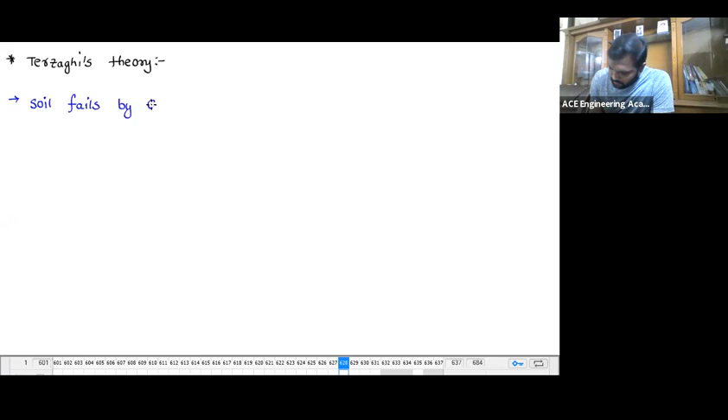Okay, so first thing first, he has some assumptions. What Terzaghi says is soil fails by general shear failure.

And second point is, whatever the base of footing, Rankine assumed the base of footing is going to be smooth. But Terzaghi says that actually this theory is nothing but modified Prandtl's theory. After Rankine, there is a person known as Prandtl, and that modified Prandtl theory is nothing but Terzaghi's theory. So Terzaghi said that the base of footing is not going to be smooth, it is rough.

Let me take a foundation. As I am discussing point number one, the general shear failure, yesterday we discussed that general shear failure and local shear failure can be seen in shallow foundations, which means Terzaghi's theory is applicable for shallow foundation or deep foundation or both? It is applicable only for shallow foundation.

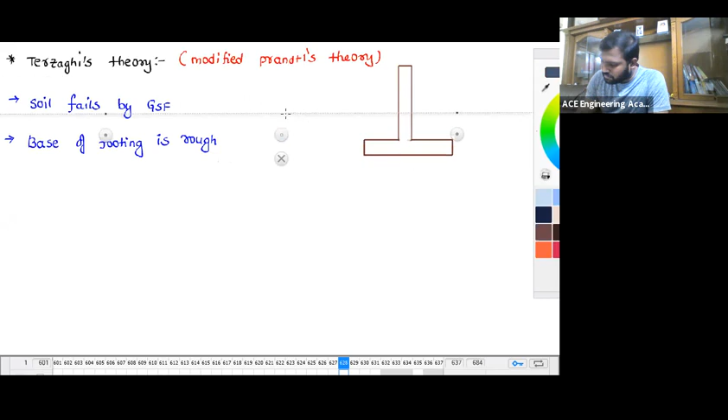So if we take a foundation, let's say this is a foundation, this is the ground level, and whatever the base of footing, this is the base of footing. So now what this says is, whatever load you apply, that load is assumed to transfer at the base of the footing only. Yes or no?

And you see here, this is nothing but the backfill. And let's say the depth of the foundation as D. So this is nothing but the depth of the foundation.

So now if you observe here, whatever load you apply, in the case of shallow foundations, we assume the load is taken by the soil. We assume the load is transferred to the base, which means whatever soil beneath the footing is able to resist the load. And whatever soil above the footing is just considered as surcharge.

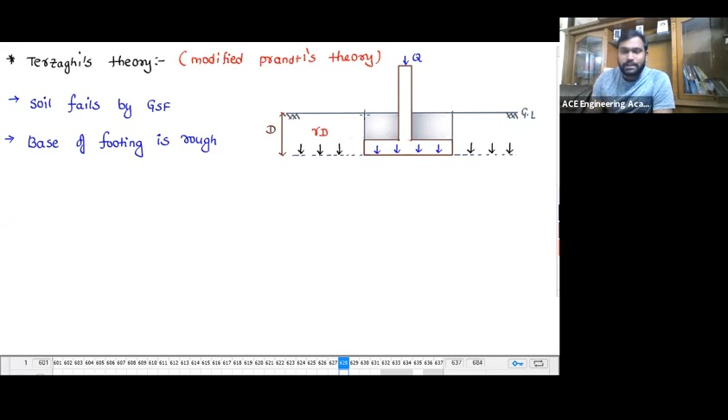So the soil above the base of footing is considered as a surcharge, gamma D, and whatever resistance of the soil mass above is neglected. Instead, what Terzaghi says is that the self weight of the soil mass acts as surcharge at the base of the foundation.

Self weight of soil above the base of footing is considered as surcharge at footing level. Which means the side resistance has been neglected - whatever resistance of the soil mass on the side has been neglected.

And the next one here is, you know that soil fails by general shear failure, base of footing is rough, and obviously when the footing settles down, you know that's a passive state. Passive equilibrium condition exists. So these are all the assumptions made by Terzaghi.

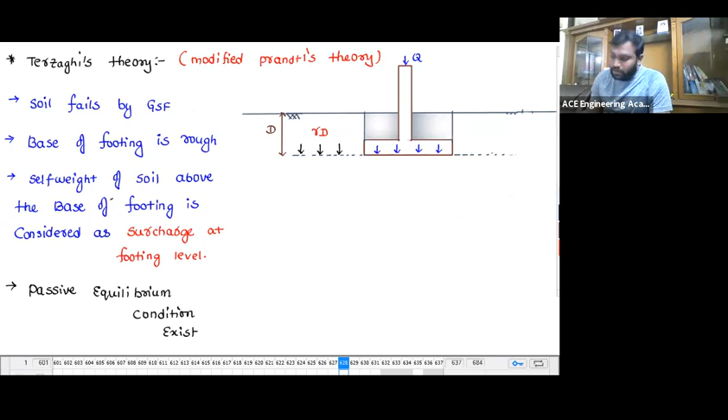Now you can ask me, sir, up to what depth does the shearing take place? The shearing takes place up to a depth exactly equivalent to the width of the footing.

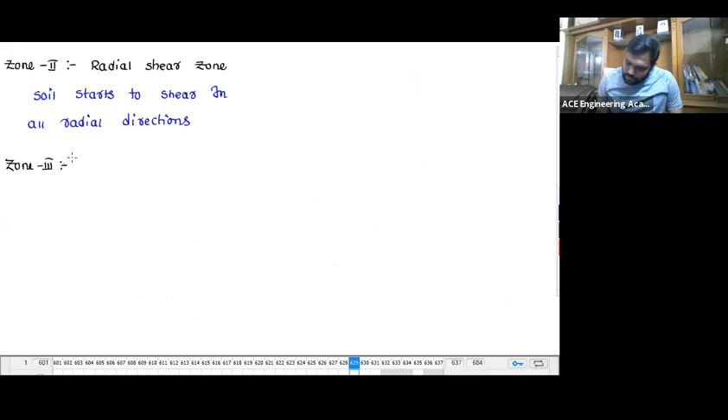In radial directions. Now the third zone, zone 3, is the passive zone. So what is this passive zone, sir? In this case, while shearing, it makes an angle of 45 minus phi by 2, if it is a passive state - go back to the earth pressure theories I told you.

So while shearing, at one point, the soil reaches plastic equilibrium and fails by making an angle of 45 minus phi by 2 with respect to horizontal.

So in the first zone, there is no shearing - it is the elastic zone. Then the radial shearing starts, and finally it reaches plastic equilibrium, going from elastic to plastic. So these are the 3 zones explained by Terzaghi.

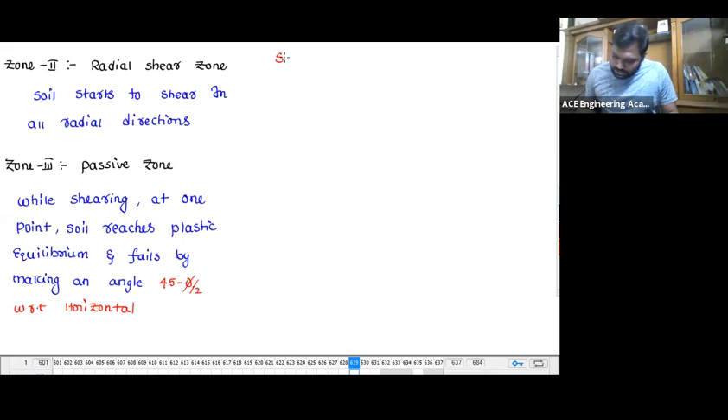After the entire discussion, he has given an equation for the strip footing. So what is the equation he has given for strip footing? Whatever equation I am going to give you is for the strip footing only, because almost all the model analysis was done on the strip footing.

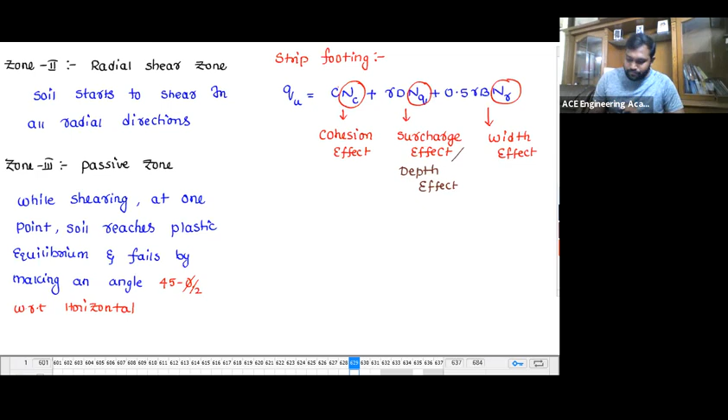Okay sir, you said C is cohesion, gamma D is surcharge, gamma B is width effect. But what about this NC, NQ, N gamma, sir? The NC, NQ, N gamma are nothing but bearing capacity factors, which depend on the angle of internal friction.

So overall, do you need to remember this as a whole formula? No, you don't need to. I can remember it as three parts: cohesion effect, surcharge effect, width effect - cohesion C, surcharge gamma D, width gamma B. So cohesion bearing capacity NC, surcharge bearing capacity NQ, and width N gamma. And if it is a strip footing, the factor is 0.5. So Terzaghi has done his analysis on strip footing only.

Sir, why do you show dotted lines above the base of footing? Because whatever resistance you would expect - the side resistance - is neglected. You know that when shearing happens like this, there must be some resistance. And you see, on top, the resistance we neglected - side resistance has been neglected. That's why.

Okay. If you want, I can show you that too. The resistance - whatever, this is nothing but resistance.

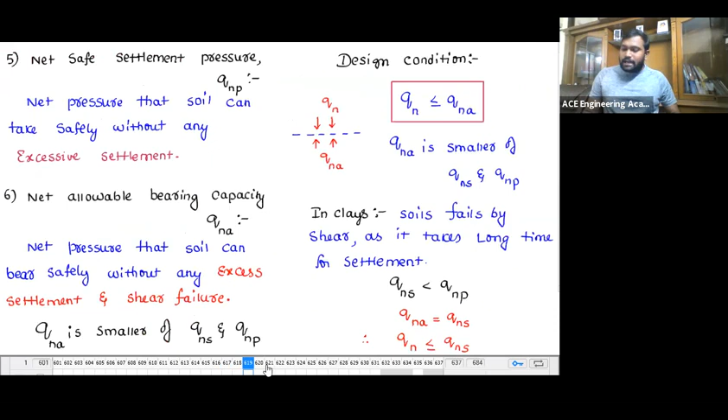So now, once I know the ultimate bearing capacity, what is the design condition I discussed with you yesterday? I hope you people have gone through the notes. I explained that the gross pressure from the structure should be less than or equal to safe bearing capacity, or net pressure from the structure is less than or equal to net safe bearing capacity.

So if you know the ultimate bearing capacity, then you can find out net ultimate as ultimate minus gamma d. And you can find out the net safe as net ultimate by factor of safety. And if you find that, you can find out the safe as net safe plus self weight. Fine, so this is the equation.

Now let's see the modification. Sir, you are saying NC, NQ, and N gamma are bearing capacity factors that depend upon phi. Sir, in examination, will they give NC, NQ, and N gamma? Yes, they will definitely provide you NC, NQ, and N gamma, except for clay soils. Why? Because in the case of clay, phi equals 0, right? For clay, the values are fixed.

Let's see that. NC is a function of phi. NQ is a function of phi. N gamma is also a function of phi. Phi means angle of internal friction. So all these NC, NQ, N gamma are functions of angle of internal friction. Okay, so now if you observe...

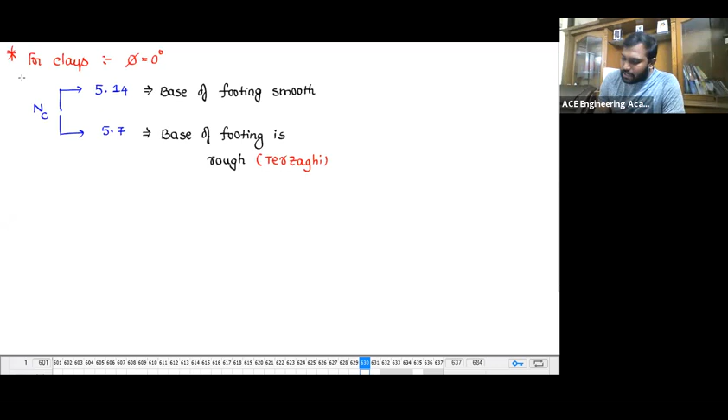Base of footing smooth. And if the base of footing is rough, then we call it NC 5.7. So what Terzaghi mentioned is the base of footing is rough. See, you have to remember this one clearly, because in examinations they sometimes say assume the base of footing is smooth, or assume the base of footing is rough, or else, as per Terzaghi, base of footing is rough.

And what about the smooth case, sir? This was given by Prandtl, my dear, not Rankine. I told you Terzaghi's is a modified version of Prandtl's. Why? Because Prandtl assumed - Prandtl did the same thing, but Prandtl assumed the base is smooth. But if the base is smooth, it is not a rigid foundation. The base should be rough so that it acts like a rigid foundation.

Surcharge effect is the soil exactly above the footing, or soil above the foundation level - that is the soil above the foundation level, whatever soil is above the foundation level. Okay, so now, NQ equals 1, N gamma equals 0. You have to remember this.

NC value is 5.14 when base of footing is smooth, and 5.7 when base of footing is rough. So NQ equals 1 and N gamma equals 0. NQ equals 1 and N gamma equals 0. So now let's recall our equation - whatever equation we have.

Everywhere I use this as a parent equation, that's it, and I'll do modifications. Simply have a look, remember N gamma is 0, NQ is 1.

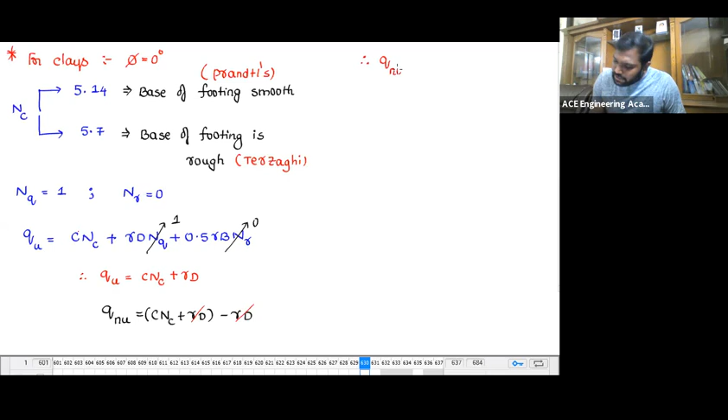So CNC plus gamma D minus gamma D, both are going to get cancelled. So eventually, in the case of clays, what is the net ultimate bearing capacity? CNC. So QU... right, so the net ultimate bearing capacity is nothing but CNC.

If you observe in the case of clays, from now onwards, if I want to design, design condition: Q less than or equals to QS. What is QS? QNS plus gamma D. What is QNU? QNU by factor of safety plus gamma D. And what is QNU? CNC.

So eventually, in the case of clayey soils, if I want to find out the net ultimate bearing capacity, I am removing the width effect, I am removing the surcharge effect. Can I give you one point after all this discussion? If you see the ultimate bearing capacity, can you see any width effect?

Ms. Ikra asks, why can't we take QS equals QU by factor of safety? In the ultimate bearing capacity, there is a self weight. Are you going to apply the factor of safety for the self weight? I told this point yesterday. Why we are not providing factor of safety for self weight is that self weight is acting for a long period of time, and if there is a failure, the failure is due to external load, not due to the self weight.

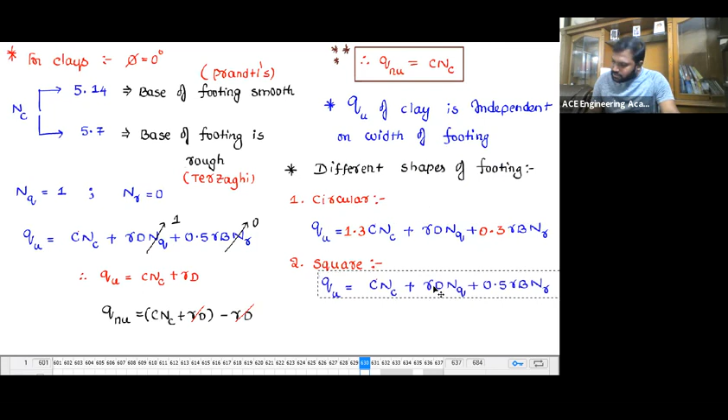Now, second one, square footing. If it is a square footing, again, same - let's take the same equation. You understand? You have to understand. Again, here also, so if I say square footing, then what is the change, sir? Again, in the case of the square footing also, the cohesion increases by 30%.

The shape factor is going to be 0.4. For circle, 0.3. For circle, 0.3. For square, 0.4. For strip, 0.5. Understood?

Now let's see the rectangle. In the case of the rectangle, how does it look like? Now, if the shape is going to be rectangle, for rectangle, how does the QU look like?

So in this case, QU is 1 plus 0.3 B by L, same CNC. 1 plus 0.3 B by L CNC plus gamma D NQ plus - or let me write this separately because

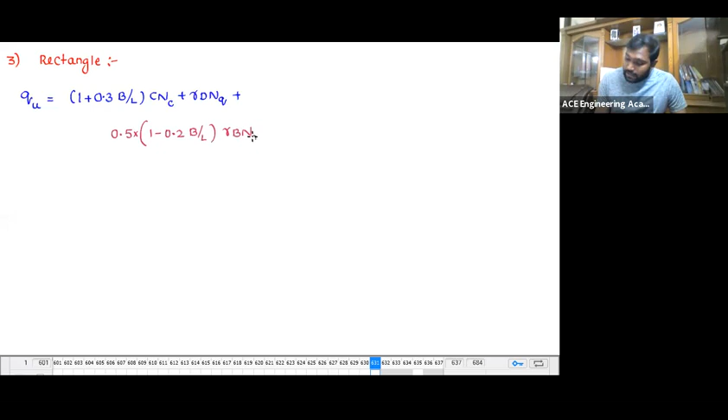Now plus gamma D NQ plus 0.5 into 1 minus 0.2 B by L, gamma B N gamma. Gamma B N gamma.

Okay, so now if you observe here, if you keep B by L as 1, then 1 plus 0.3 becomes 1.3. If I keep B by L as 1, 1 minus 0.2 is 0.8, into 0.5. 0.8 into 0.5 means half of 0.8, which is 0.4. So in the case of the rectangle, QU equals 1 plus 0.3 B by L CNC plus gamma D NQ plus 0.5 into 1 minus 0.2 B by L gamma B N gamma. So circular, square, and rectangle - these are small modifications.

The main equation is whom? The main equation is Terzaghi for strip. If I say square, cohesion increases by 1.3 and shape factor 0.4. For circle, 0.3 shape factor, cohesion increases by 30%.

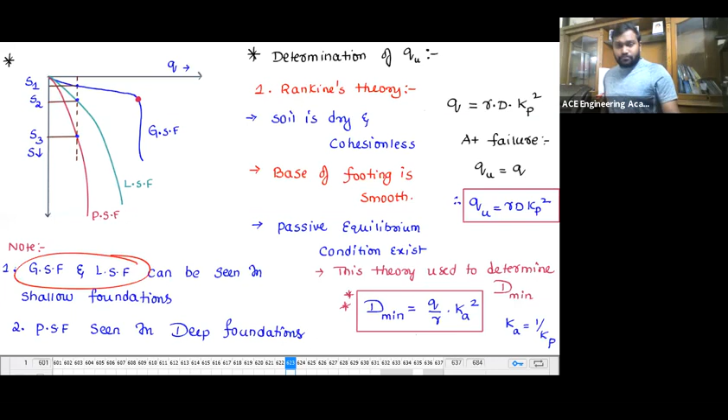Now, one more thing. Terzaghi said this theory for whom? General shear failure. But you know that general shear failure and local shear failure can both be seen in shallow foundations. But what is the biggest difference between general shear failure and local shear failure? This is a full shearing, but this is a partial shearing. The meaning of full shearing is that full cohesion and full friction are going to be mobilized. The meaning of partial is that the developed cohesion and friction are not the actual values.

So now if you observe, for local shear failure, which means LSF, when phi value is less than 28 degrees. So whenever in the given question they sometimes mention local shear failure, else if you see the phi value less than 28 degrees, you have to take it as LSF.

So now in this case, what to do? Same equation, I'm not going to change the equation. You see how many times I'm using the same equation. But sir, then what is the difference? The simple difference is going to be here: the C is no more C, the C becomes CM, and phi is also going to change, right?

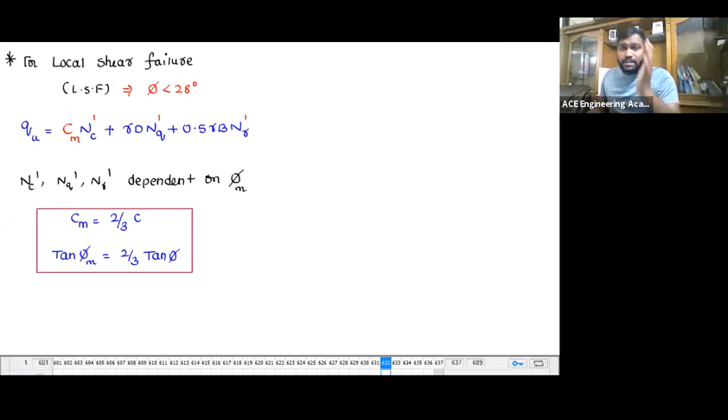Here it's all about understanding the modification. So if it is a local shear failure, the shearing happens locally or partially, so the strength is not mobilized fully. Cohesion will not mobilize fully. How much will it mobilize? Only 2/3 of the actual value.

So that's about local shear failure. Sir, we consider different types of shapes? Yes, we consider different shapes. Yes, we consider different soils. Yes, we consider different failures.

Now one thing is left over, which is nothing but Terzaghi's main concept. Terzaghi's principle is based on effective stress. And the effective stress comes into existence when there is a water table. Now let's see the effect of water table. What is the effect of water table?

By using the Taylor's chart, we don't find mobilized cohesion, sir. How come you find out? You don't do that, that is for the stability of slopes. This is for the stability of foundations. Okay, so effect of water table - now let's take a footing.

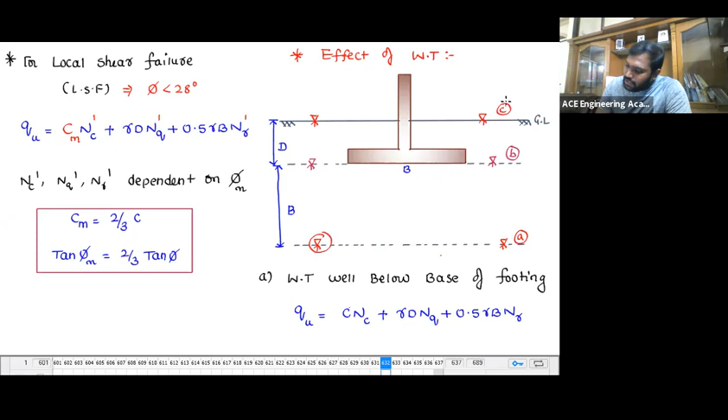Now, in the case of cohesionless soil, if water table rises from A to C, can I take gamma common? Yes. And after the water table rises over here, can I take gamma dash common? Yes. Which means, in the case of cohesionless soil, when the water table rises from well below the base of footing to the ground level, gamma is changing to gamma dash.

When gamma is changing to gamma dash, is it reducing or increasing? Obviously, gamma dash is very, very less. Gamma is changing to gamma dash, which is almost half, not exactly half, but almost half. So when the water table rises from well below the base of footing to the ground level, in cohesionless soil, the ultimate bearing capacity reduces by almost 50%.

In cohesionless soils, when water table rises from well below the base of footing to ground level, the ultimate bearing capacity reduces by almost 50%. Why, sir? Because gamma is changing to gamma dash, gamma is reducing to gamma dash, and the gamma dash is almost 50% of the gamma.

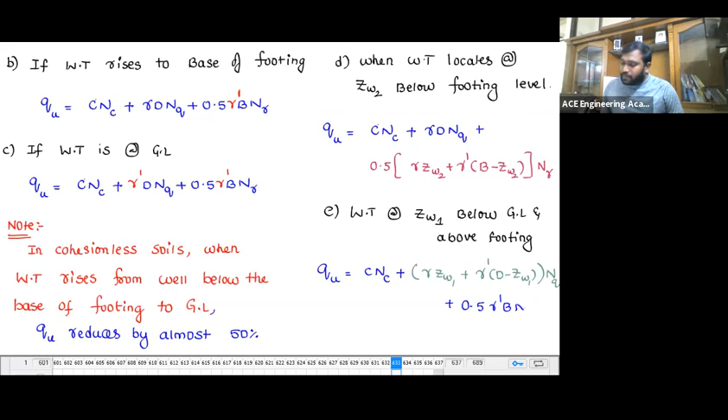You tell me, do you really need to remember all these formulas, whatever is written, whatever discussion I've done? No, if you have understood, then you don't need to. What you need to understand is: below water table, only submergence; above water table, gamma. That's it.

And for this explanation, there is one more method known as the approximate method, based upon some factors — ultimate bearing capacity based upon water table reduction factors. See, this is exact analysis, whatever discussion I have given, A, B, C, D, E. Now there is one more methodology known as the approximate method, based on water table reduction factors.

Again, same equation, but what changes here is we will include a factor, the water table correction factor, RW1 or RW2. So what is this RW1 and RW2? That's the reason I represent between ground level to base of footing as ZW1, and below base of footing as ZW2.

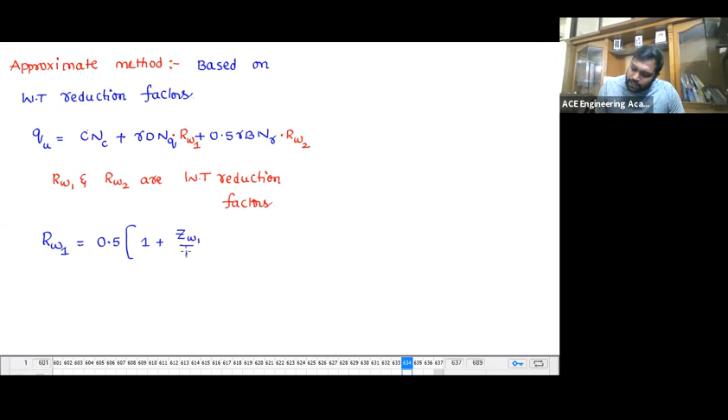So what is meant by ZW1? First, what is RW1? RW1 is nothing but 0.5 into 1 plus ZW1 by D. What is the range of ZW1? ZW1 is below the ground level — meaning if the water table is at ground level, ZW1 is 0.

Give me a minute, please.

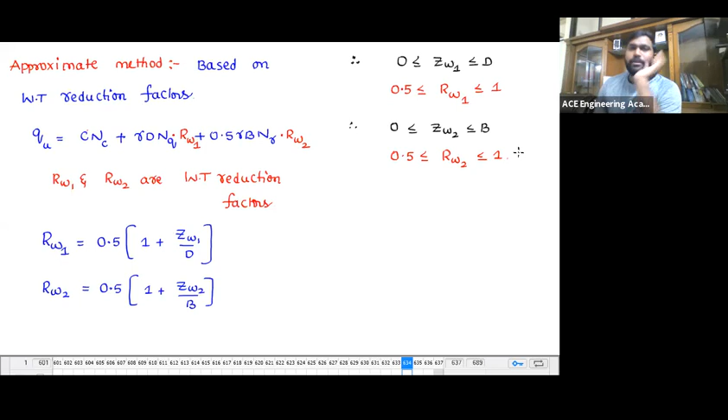Case A: when water table is well below the base of footing, when water table is well below the base of footing, when water table is well below the base of footing, then you please tell me what is ZW1?

When the water table is well below the base of footing, then what is ZW1? Come on, tell me, what is the ZW1? Papa, water table is very well below the base of footing. Here, what is ZW1? Do you think ZW1 is D plus B? No. What is the maximum depth of ZW1? The maximum depth of ZW1 is D only. Yes, so what is ZW1? It is going to be D.

Okay, and what is ZW2? What is ZW2? The ZW2 is also going to be B. So when the water table is here, the maximum value of ZW1 is D only, and the maximum value of ZW2 is B.

So now you tell me here, when ZW1 is equals to D, what is RW1? RW1 is equals to 1. RW2 is equals to 1. Yes or no? Now if you substitute in the equation, what should be the value? This is how the ultimate bearing capacity looks like. Yes or no? So CNC plus gamma D NQ plus 0.5 gamma B and gamma. I hope you understood.

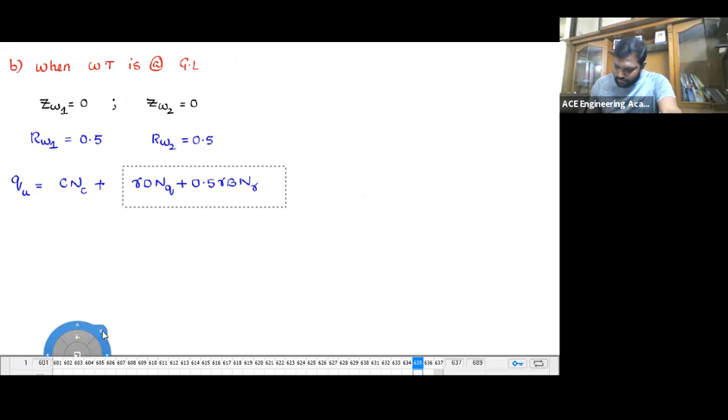So now RW1 and RW2 are going to be 0.5. Now if I write the ultimate bearing capacity, in this ultimate bearing capacity, I have two factors, right? So RW1 and RW2. So this is going to be 0.5 into this value, and this is going to be 0.5.

Yes or no? Now, can you please tell me, from this itself, you can say if it is a cohesionless soil, if cohesionless soil, if C is equals to 0, then what is QU?

Gamma D into NQ plus 0.5 gamma B into N gamma. I'll show you the conclusion I've made, and represent it here too. So if C is equal to 0, what is the ultimate bearing capacity here? I can take out the 0.5 common, yes or no? Gamma D into NQ plus 0.5 gamma B into N gamma. Hope you got this. This is 0.5 into gamma D into NQ plus 0.5 gamma B into N gamma. Understood or not? This is the water table correction factor.

All this analysis I have given for the sake of better understanding only. You don't require too much detail. If I asked you, at a particular depth, find the water table correction factor, can't you find it out? One value, RW1 and ZW1, should be used below ground level, above footing. And RW2, ZW2 should be used below footing, and above, well below the base of footing. Hope you understood.

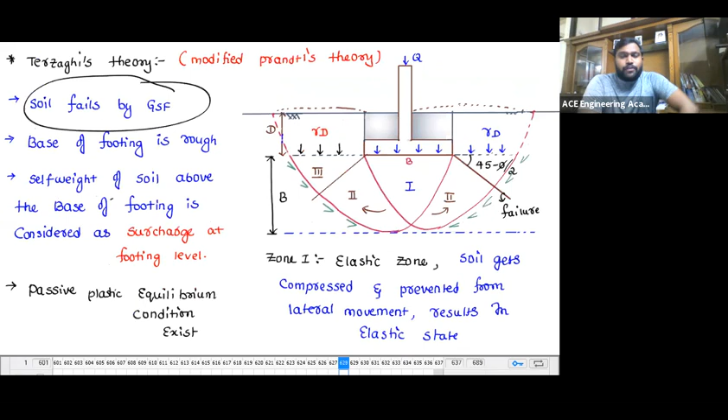Number two: Terzaghi's theory is only for general shear failure, which means it is only for shallow foundations - he did not account for depth. This theory is not suitable for pile foundations or deep foundations, so I cannot use it there.

So one thing for sure, listen carefully: Terzaghi did not account for different shapes. He took only strip footing - his entire analysis is for strip footing only. But we managed it somehow and wrote these equations ourselves. So shape has not been considered, shape has not been considered, okay. Number two.

It is suitable only for shallow foundations, so he did not consider the full depth. Whatever the depth, whether shallow or deep, he did not consider it - he considered only shallow foundations. Depth factor also not considered. Number three.

Do you think the load is always going to be concentric? Don't you think footings can be eccentric too? Yes, it can be eccentric too. Do you think loading or footing is always going to be concentric? Concentric means center, so sometimes the load can be eccentric too. So he did not take care of eccentricity - he didn't even bother about it.

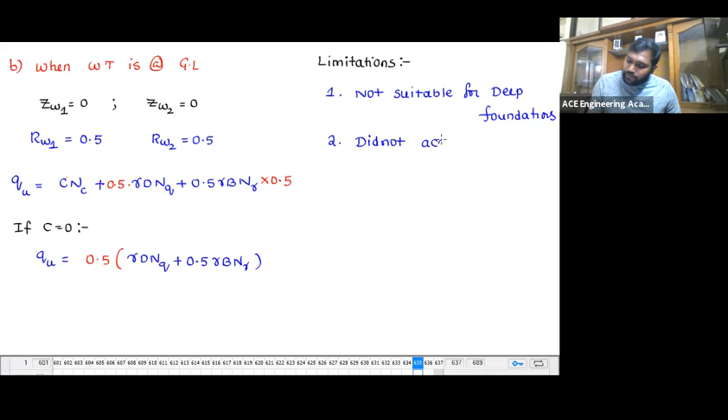The limitations for various theories. Number one, it is not suitable for deep foundations. Did not account for footings other than strip footing.

Okay. Inclination of load and depth factor is not considered. So these are all the various limitations of Terzaghi's theory. He provided for water table, but the biggest limitation is it is suitable only for shallow foundations.

And there comes the next theory, which is Skempton's theory. Sir, can we use this theory for stratified soil? Yes, you can use it. There is no problem with stratified soil.

So now the second theory is Skempton's theory. What is this Skempton's theory, sir? Skempton's theory says that this theory is suitable for undrained cohesion only.

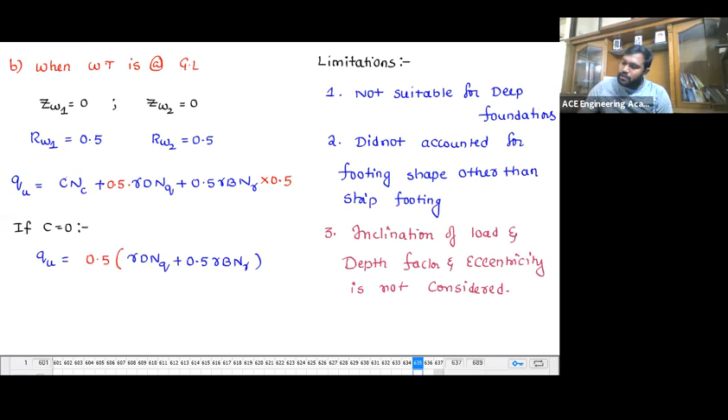Inclination of load, depth factor, and eccentricity are not considered. Okay, so according to Skempton, what he said is, for clay, what is the net ultimate bearing capacity? The net ultimate bearing capacity is C times Nc. Skempton also used the same thing. The net ultimate bearing capacity is C Nc only, he didn't take care of anything else.

Now, what is the difference? Nc is 5.14 according to Prandtl. Nc is 5.7 according to Terzaghi. And now, in the case of Skempton, Nc is not going to be constant. There comes the difference because it should be applicable for both shallow and deep, right? So Nc equals 5 into 1 plus 0.2 D by B, because for shallow or deep, it has a different width, different depth. So for different depth and width, the D by B value changes, and Nc value changes. This is for strip footing.

So strip footing, this is for strip footing. And what about other footings? Nc equals 5 into 1 plus 0.2 D by B into 1 plus 0.2 B by L. Yeah, if you ask me to remember this, yes, you have to.

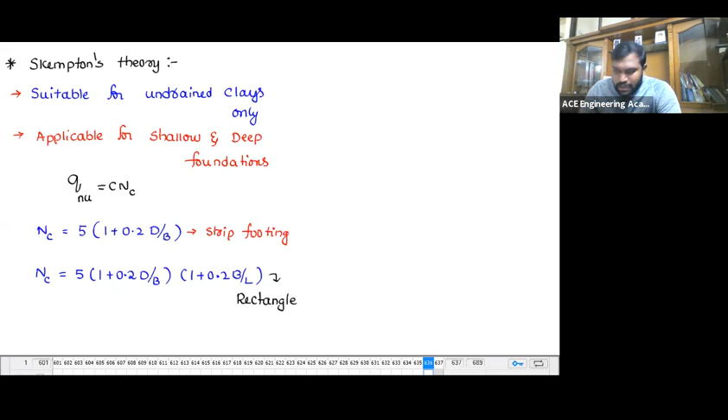Arey baba, you asked me a good question. One of our students is asking, sir, what if there is a surcharge? Sir, already whatever soil is above the footing is also surcharge. For example, if you have to apply 50 of surcharge, then it is going to be gamma D plus 50. That's going to be the surcharge. So whatever soil or load is above the footing, you have to take it as surcharge.

So for a rectangle, now if it is a square, what is going to happen? If it is a square, then B by L equals 1, so it's 1 plus 0.2, which is 1.2. 1.2 into 5 is 6. So then it's 6 into 1 plus 0.2 D by B. So this B by L is taking a shape into account.

Shape account. For strip footing, I don't need to worry about shape because L is greater than B. But for rectangle, the shape is different. For square, the shape is different, dimensions are different. So the shape factor was accounted for, and depth also accounted for. So you have taken care of depth and shape. But still, this lacks inclination, and it still lacks eccentricity. Okay, so this is for square footing.

You see, I am not taking too many formulas. I am taking only one formula, a very cute, sweet formula, known as net ultimate bearing capacity, which is CNC. And in that NC, we are changing everything. In the case of Skempton's theory, he took depth and shape into account, but he did not account for inclination. By taking all this into the factors, now there comes one more theory known as Meyerhof's theory.

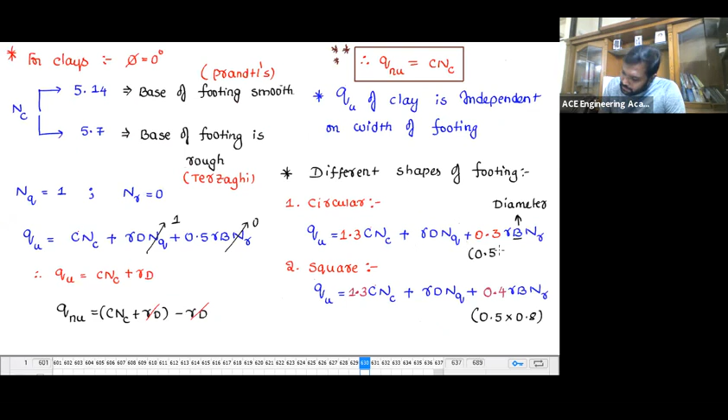Sir, here we are taking into consideration the phi equals 0 point. Very good question again. Now let me go back once again. This is the basic equation I told you. And how I attained these values: 0.4 is nothing but 0.5 into 0.8. The 0.3 is nothing but 0.5 into 0.6.

You observe, the shape factor is 0.6 here, and the shape factor is 0.8 here. So 0.5 into some factor gives 0.3, and 0.5 into some factor gives 0.4. Understood or not? Similarly, you observe here also, 0.5 into this factor is nothing but for the rectangle.

So now, instead of using all these things, I'm giving you finally one value. Okay. So this is about Skempton's theory and Meyerhof's theory.

And still one thing is left over: that is eccentric load. If we complete eccentrically loaded cases, the analytical things will be completed in this chapter. So now let's see what this eccentric load is. So if I were to give an eccentric load, what happens?

So I am dividing every topic as a scheme, and once you understand this, you can digest it easily. Now, so far so good. Whatever discussion we made, whether it is Rankine's, Terzaghi's, Skempton's, or Meyerhof's, everybody took the load as a concentric load. But what if the load is not concentric?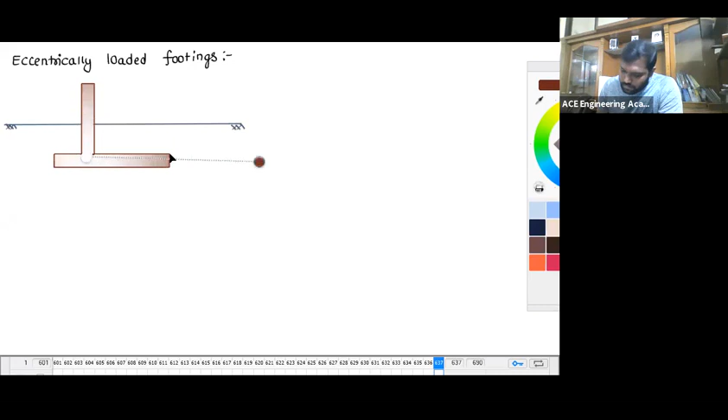Eccentrically loaded footings. So in the case of the eccentrically loaded footing, what if the footing is not concentrated? Let's take a footing. Listen to me. If this is a footing base, and let's say the footing is not at center. I mean the column is not at center. So this is the ground level.

Now in the case of the ground level, if you observe here, whatever load I am applying is Q, and the line of action... whatever the line of action. From the center, let's take this is the center. From the center, in the axis where I am seeing the width axis, let's take whatever this value is, Ex. Whatever the eccentricity, eccentricity means from the center only, right? If this is Ex, then what about this value, my dear?

What about this value? The total width is b by 2, no? This is the center. So from the center, the load is acting at Ex. And what about this value? This is nothing but b by 2 minus Ex. Can I say like that? Yes. Questions are also framed from this only.

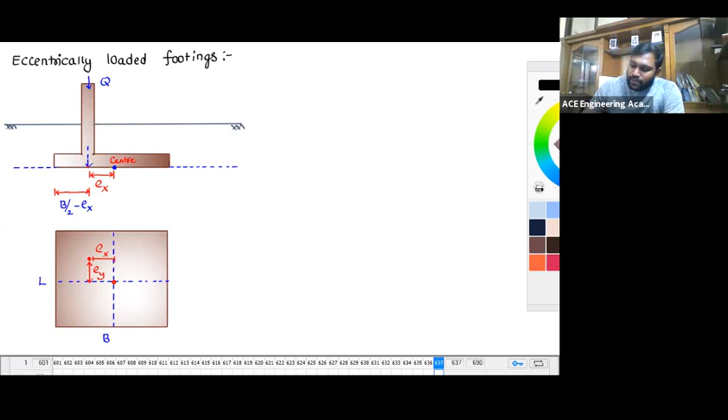Yes or no? Now you tell me, does the load have a one-way eccentricity or two-way eccentricity? From the center line in the X direction, the eccentricity is Ex, and from the center line in the Y direction, it is going to be Ey. So is it one-way or two-way eccentricity? It's a two-way eccentricity. What if I say the point is only here? Is it one-way or two-way eccentricity here? Now this is only one-way, because the point lies on the center line, but has some distance in the x-axis.

So now based upon one-way or two-way, if it is two-way, there are two eccentricities, Ex and Ey. Now please observe, this is two-way eccentricity. Fine. I hope I was able to make you understand what is Ex and Ey. Okay, come on, you know this value. This value is nothing but same b by 2 minus Ex. And you need to know this value also, right? What about this value?

What about this value? This value is nothing but L by 2 minus Ey.

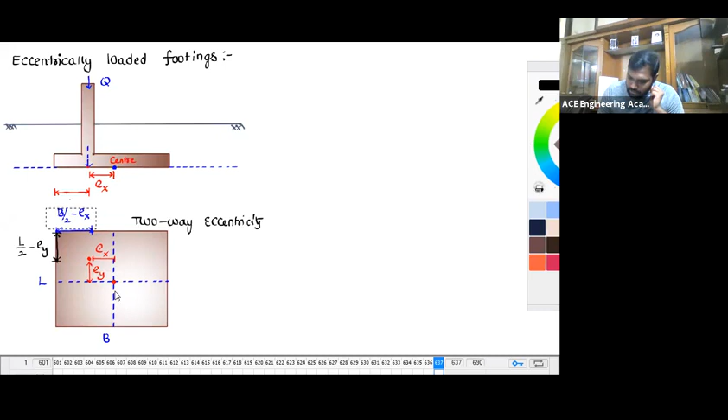Now after all this discussion, whatever theories have been explained, whether it is Rankine's or Terzaghi or Skempton's or Meyerhof, everybody assumed the load is acting at center, a concentrated load.

So I don't have any theory which represents eccentrically loaded footings. So I have two options now. One option is either we create a new theory for eccentric loading, or we use the existing theories. If we want a new theory, we'd have to do research, but you are not doing research, you are going for examination, so don't bother about that.

The second option is much better. What is that second option, sir? Concentrated load. But sir, here it is eccentric, na? Then what can I do? I will convert the eccentric load into an equivalent concentrated load.

So to apply the existing theories in order to find out the ultimate bearing capacity, I am going to convert this eccentrically loaded case into an equivalent concentrated load. Sir, how is that going to be possible, sir?

Simple. What I'll do is, I don't take the total area now. I will just take the area where this load is going to act as the center. Now you see how I'm going to do that.

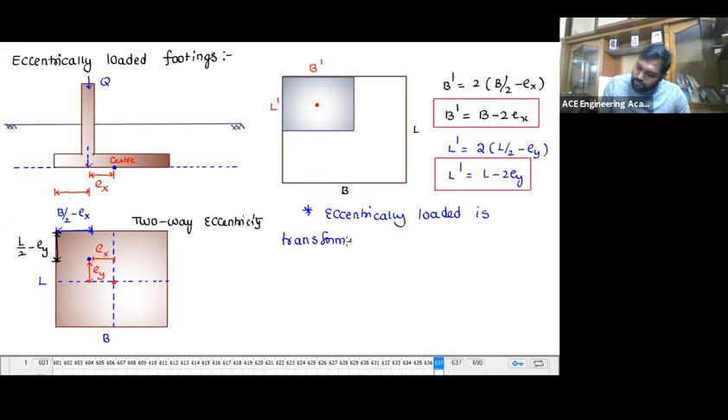Okay, so what we have done is we have reduced the base area to B dash by L dash. The eccentrically loaded footing is converted, or transformed, to an equivalent concentrated load footing by reducing the base from area B by L to B dash by L dash.

And what about the ultimate bearing capacity now? The ultimate bearing capacity is cNc, what we know, I can write that - everything the same equation we take. But what is the change? The change we are going to see here is simply B becomes B dash. The same equation, but with eccentricity, B becomes B dash.

Sir, where do you use L, sir? When you are going to find out the loaded area, na, QU equals load by area - in that area you have to reduce this to B dash by L dash. So hope you understood now.

If it is one-way eccentricity, for example, if the load is acting at one-way eccentricity now, with EX only, for the one-way eccentricity, what would be there? So again, you take this point, now you take the center.

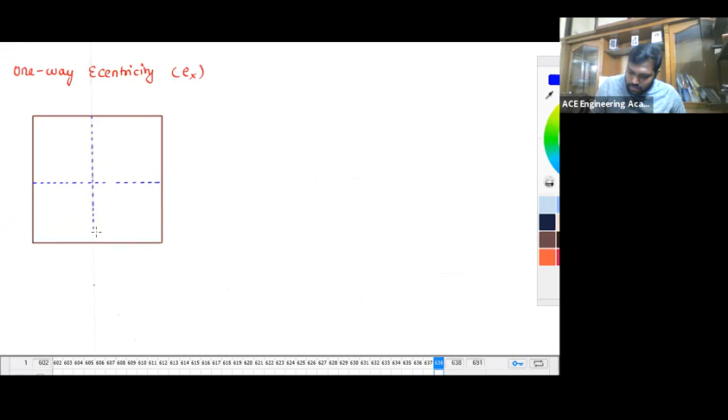So this is a center. Now let's say the load is acting over here with a one-way eccentricity only. With one-way eccentricity only. So now what do we do? Come on, now what do we do?

If it is a one-way eccentricity, I don't need to modify the length direction. No, I don't need to. So what I do is I have to make sure this point is a center. So if I want to make sure this point is a center, now please observe, what I'll do is I'll just mark up the same distance on the other side.

Now this is B dash and this is L dash, which is equal to L only. So now if I make sure this point as a center, B dash is nothing but B minus 2EX. But what about L dash? L dash is simply L only. So based upon the eccentricity, you have to define it.

And once you know that, what is B dash? B minus 2EX. If you ask me what I'll do now, whatever this value, if I want to make this center, the other width also should be the same. I want to make this point the center, so if this value is B by 2 minus EX, the other value is also B by 2 minus EX. The total width is 2 times of B by 2 minus EX. Hope you understood.

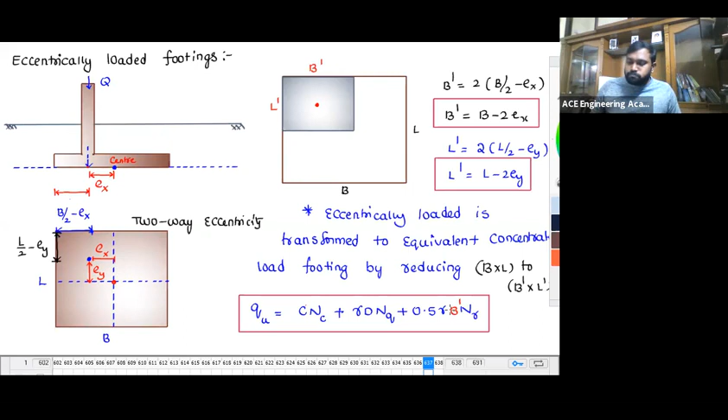So with this, we completed it. Sir, where do we use L? In the area - load is there, right? Whatever the ultimate load, some ultimate load by area would be there. There you are going to find out. Wait for the questions, there I'll explain. Don't worry about that.

So this is the analysis - how to determine the ultimate load carrying capacity, ultimate bearing capacity. Once you know the ultimate bearing capacity, you very well know how to design. So let's have a break now.

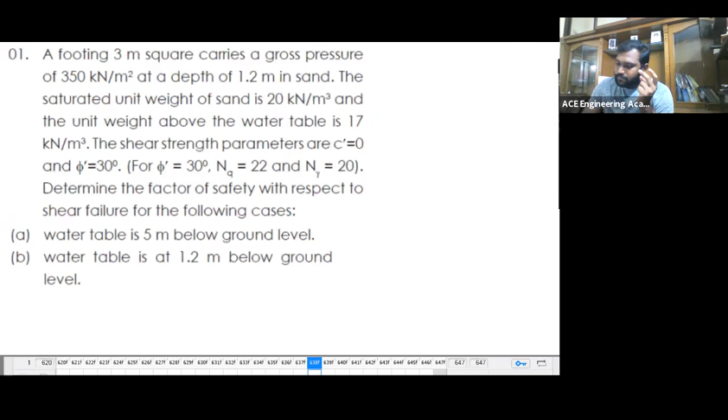Okay, so let's start solving the questions. You see question number one first. I already told you, while solving a question we have to be very careful about what type of footing they are giving, what type of soil they are giving. So we need to be careful about that. You see, in this question it is mentioned a footing 3 meter square, which is nothing but a square footing of 3 meters - square footing 3 by 3 meters.

Carries a gross pressure of 350 kilonewton per meter square. So there is a square footing which carries a gross pressure. What is the meaning of gross pressure?

Vaibhav Vasudhani, is this chapter over? Yes, it is over, you can pack up. Give a minute, please.

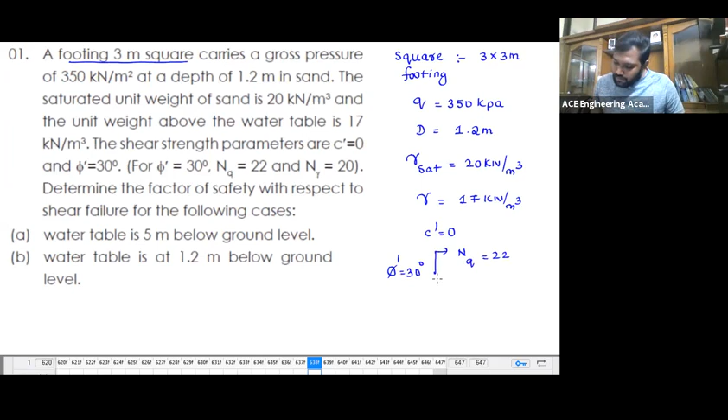So we have mentioned the shear strength parameters, which are C equals 0, and for phi 30 degrees, as I already mentioned, they will give NC, NQ, N gamma. Anyway, when C equals 0, the cohesion effect is gone, so I don't need to worry about the cohesion effect. NQ is 22 - don't ask me why they're not giving NC, sir; even if they do give NC, it's of no use. And N gamma is 20.

So what I am asking you is to determine the factor of safety with respect to shear failure. So what is the factor of safety? This is what we are going to see. First thing first, I told you the design condition, right? I told you the design condition. So what is the meaning of design, sir? What is the meaning of design?

If you want to design the width of the footing, the depth of the footing, or you want to know the safe load acting on the footing, and if you want to know the factor of safety, these are all design conditions. So when designing, you need to know the width of foundation, the depth at which you are going to go for the foundation, the load that the soil can take safely, and with what factor of safety you are going to apply that load. Okay, so this is a design criteria.

First, let's draw the figure.

Shubhaibo, you are being in the class, right? You are being in the class, and you know that the chapter is going on. Then how come you think that the chapter is over?

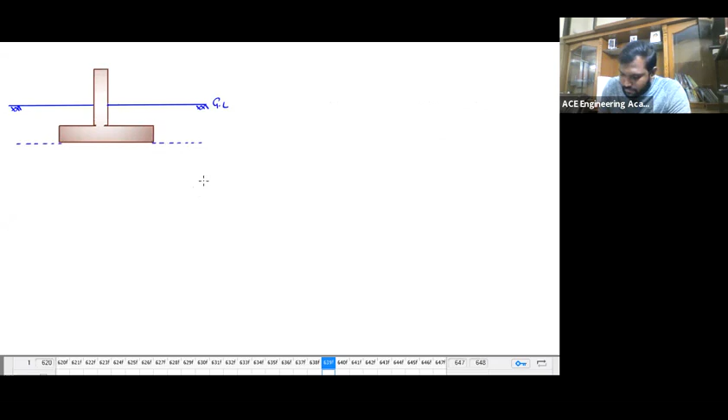So now let's take this as the footing. And you know that this is the ground level. So the footing is located at a depth of 1.2 meters.

The footing is located at a depth of 1.2 meters. And what is the width of the footing we have mentioned? The width of the footing is 3 meters. And whatever analysis we are going to do is up to this depth, which is also going to be 3 meters. So up to that depth we are going to go.

Now let's see how to solve the factor of safety, how you are going to find it out. First case: in case A, water table is 5 meters below the ground level, meaning the total depth itself is 1.2 plus 3. So if water table is 5 meters below ground level, is it well below the base of footing or just below the base of footing? It is well below the base of footing. So this is 5 meters.

Case A: water table at a depth of 5 meters below ground level. So if I say this, is there any change in the ultimate bearing capacity? No change in the ultimate bearing capacity. I want to find out the factor of safety.

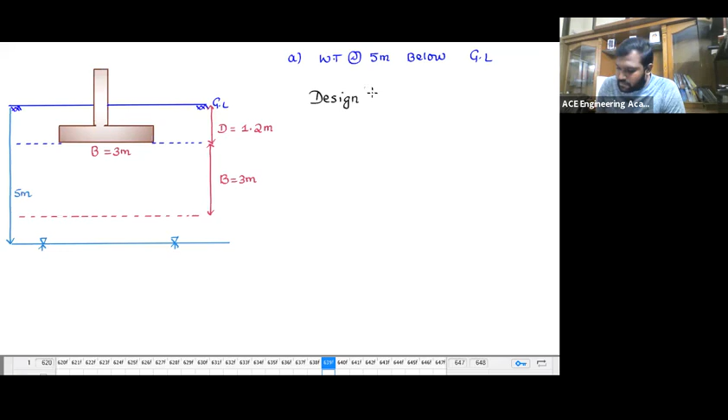Whenever I want to find out either factor of safety, depth, width, or load, you need to go for the design condition. What is the design condition? The design condition is Q less than or equals to QS, and the minimum design condition is Q equals to QS. So the design condition is that whatever gross pressure is acting should be less than or equals to the safe bearing capacity.

And what is safe bearing capacity? Q is equals to QS. Safe bearing capacity is nothing but net safe bearing capacity plus gamma D. And the net safe bearing capacity is nothing but net ultimate by factor of safety plus gamma D. So this is the design condition.

What I want is factor of safety, but for that you need to find out the net ultimate bearing capacity. And what is ultimate bearing capacity? Is it a square footing or strip footing? Square footing. As it is a square footing, it is 1.3 times C N C plus gamma D N Q plus 0.4 gamma B N gamma. So in the case of the water table at 5 meters below, there is no effect of the water table.

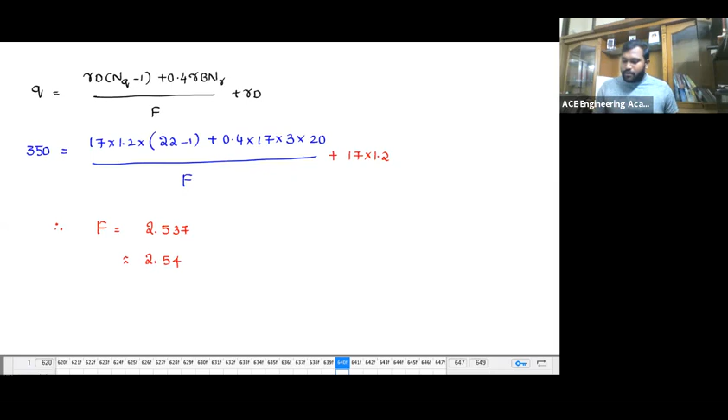Okay, so similarly, what is the difference if the water table is different, tell me. What is the second question? Water table is at 1.2 meters below ground level. If the water table is at 1.2 meters below ground level, this is case A, and this is case B, where water table is at 1.2 meters below ground level.

So now if this is the case, what will change? Tell me where in the entire equation you are going to see the change. Only this gamma becomes gamma dash, that's it, right? For case B, water table is at 1.2 meters below ground level, which means at footing level.

At footing level, so what would be the ultimate bearing capacity? The ultimate bearing capacity is nothing but gamma D into NQ only, plus 0.4 now gamma dash B N gamma. For the first and second question, the only change is this one. Apart from that, is there any other change? Nothing, right?

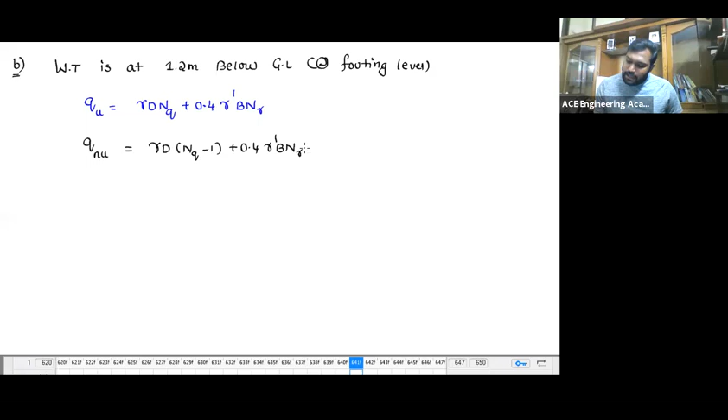So if this is the case, then what is QNU? Gamma D into NQ minus 1, plus 0.4 gamma dash B N gamma. And what is Q? QNU by factor of safety, gamma D NQ minus 1 plus 0.4 gamma dash B N gamma, by factor of safety, plus gamma into D.

So as I am asking you, above the water table this is gamma, below it is going to be gamma sat. I already mentioned gamma sat as 20. Okay, so now hope you understood the steps, yes or no? You have to be habituated with the steps.

This is square, my dear, this is not a strip, it's a square, so it's not 0.5, it's 0.4. So now 350 equals, again, above water table 17 into 1.2 into 22 minus 1, plus below water table 0.4 into gamma dash, gamma sat minus gamma w.

So what is gamma sat? I have given you, gamma sat I mentioned is 20. 20 minus 9.81, into B value, 3, into N gamma 20, divided by factor of safety, plus 17 into 1.2. Find out the factor of safety.

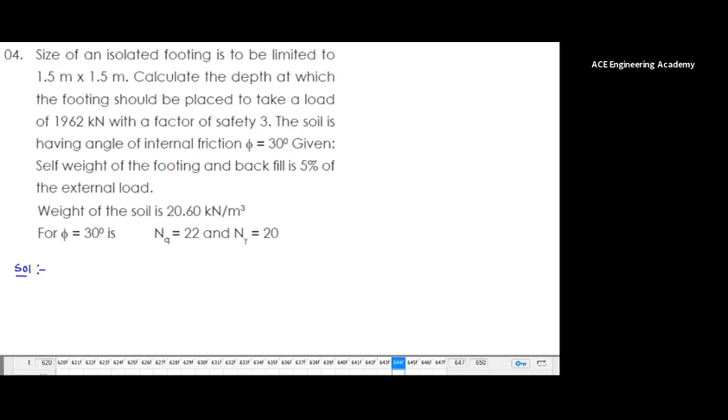So size of an isolated footing is to be limited to 1.5 meter by 1.5 meter. Calculate the depth at which the footing should be placed to take a load of 1962. So I hope you might have understood the question. If you have, now let's see.

So here the size of an isolated footing is to be limited to 1.5 by 1.5, which means it's a square footing, yes or no? So the size is 1.5 meter and this is a square footing. So immediately in your mind, what formula do you have to use?

Okay, calculate the depth at which. So I am asking you the depth at which the footing should be placed to take a load of 1962 kilonewtons with a factor of safety of 3. So I am asking you the factor of safety is going to be 3. Okay, 1962 - that's not the end of the question.

But here, I did not mention anything regarding whether it is gross load or net load. Because when the pressure is coming from the structure, there are two types of pressures - one is gross, another one is net. The soil has an angle of internal friction phi 30 degrees.

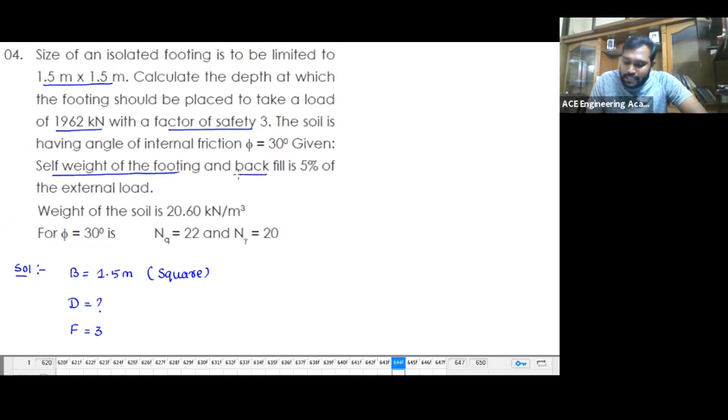Given self weight of the footing and the backfill is 5% of the external load. So whatever the external load is, that's nothing but 1962, right? So the load coming from the structure is 1962. Apart from that, you know that at the base, the total pressure is due to external load plus self weight of the soil. And here they have given self weight of the footing also.

So I can take the net load as 1962 kilonewtons, whereas the gross load is external load plus 5%. So the gross load equals external load plus 5% of the external load. 5% of the external load, which is nothing but 0.2... wait, so now what is the gross load here? The gross load is nothing but 1.05 times 1962.

...60.1 kilonewtons. Okay, so the gross load is going to be 2060.1 kilonewtons. That's the gross load, 1.05 into 1962. Okay, fine.

Now, if you observe, what I am asking you here is the weight of the soil is nothing but the unit weight. I am asking you the depth - that's it. Is it a design condition or not? Yes, it is a design condition.

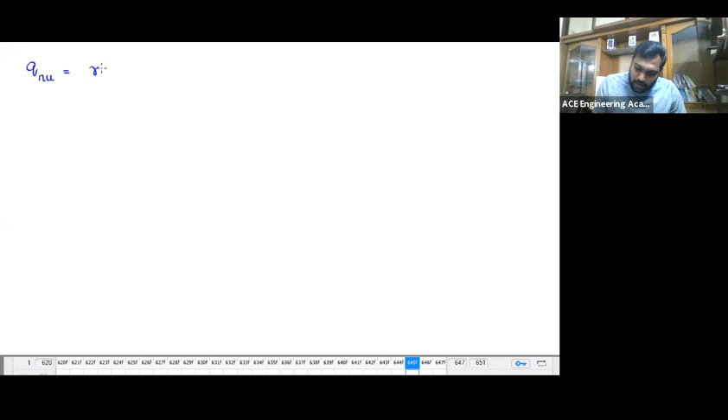So now, if you observe from here, can I write QNU is equals to - should I write everything - gamma D into NQ minus 1 plus 0.4 gamma B N gamma. Why I have written like this is because C is equals to 0. So now Q is nothing but this value - gross load by area equals net ultimate bearing capacity by factor of safety, net safe bearing capacity plus gamma D, gross safe bearing capacity.

So now whatever the gross load I got is 2060.1 by area. By area - what is area? 1.5 by 1.5.

Q is equal to gamma D into NQ. So what I have to write is gamma D into NQ minus 1. What is gamma given? 20.6 into D into NQ, 22 minus 1, plus 0.4 into 20.6 into, what is the B value? 1.5 into N gamma 20. Now, what is the factor of safety I have mentioned? 3, plus gamma 20.6 into D. So please substitute and get to know.

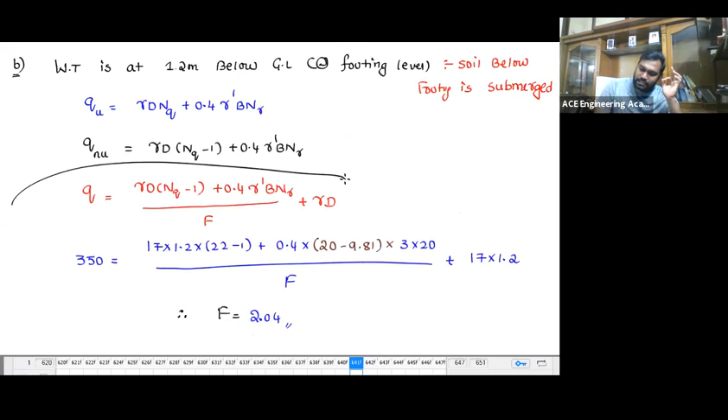I hope you got the difference between the previous question and this question. In the previous question, I gave you the gross pressure directly. Here, I gave you the load, the external load. Then I asked you to calculate the gross load, and then I am allowing you to calculate the gross pressure. So now I hope you understood. Everything at the end, the step is going to be same. This is the same step I used there also.

So please tell me the answer. The answer should be some 6.05. It's 0.23 - why are you getting 0.23 there? 5.06 or something else, tell me the value please. So you take 3 to the other side, whatever this value comes out to be. 0.4 into 20.6 into 1.5 into 20 by 3. 2060.1 divided by 1.5 into 1.5. Nice answer. 833.2. Okay, so this value.

Divided by... so please tell me the D value. What is the D value you got? The D value you got as 5.06. So first we find out the factor of safety, then we find out the depth also. Hope you understood.

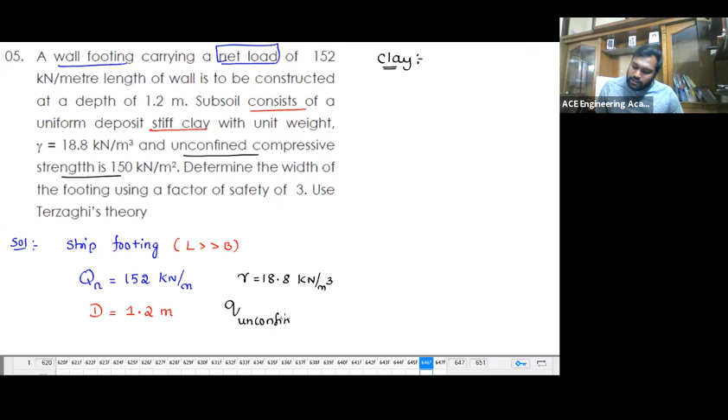I hope if you remember in chapter number 13, shear strength, the unconfined compressive strength is nothing but 2 times the shear strength. Remember this, which is given as 150. So now can you tell me what is CU? 75 kilopascals.

Now you see what I am asking is: determine the width of the footing using a factor of safety of 3, using Terzaghi's theory. Now, whenever you know clay, phi is equal to 0 degrees, and as I mentioned, this is nothing but Terzaghi. For Terzaghi, you know NC is 5.7. Why? Base is rough. NQ is equal to 1. N gamma is equal to 0.

See, I'm going again from basic. If you ask me, the logic is directly I can write net ultimate bearing capacity is CNC. Yes or no? So you know that QU is equal to, it's a strip footing, right? As it is a strip footing, CNC plus gamma DNQ plus 0.5 gamma B N gamma. So now you know that what is happening? N gamma is equal to 0. NQ is equal to 1.

Then QNU is equal to QU minus gamma D. Then what is QNU? CNC. This we know, but what I required is width, right? For factor of safety, load, depth, width, design condition - come on. If you ask me, I would have solved this one with a single step. What is the design condition?

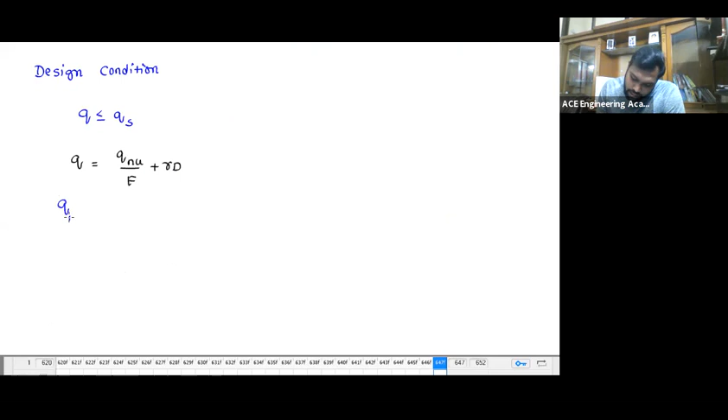But in the given question, do I have net load or gross load? Net load. So can I write the gross pressure as net load plus gamma D? That's QNU by factor of safety plus gamma D. Yes, I can remove the gamma D on both sides, and then write net load by area as net ultimate bearing capacity by factor of safety. As simple as that.

What is the net load given? 152. By what is the area of a strip? B into 1, the area is nothing but B into 1. So B into 1 equals net ultimate bearing capacity by factor of safety. What is net ultimate bearing capacity? C into NC, which is CNC by factor of safety. What is C? 75 into NC 5.7 by what is the factor of safety? 3.

What is the B value? Please tell me. 1.067 meters.

Now, after solving this, do you feel this concept is typical or easy? What I am dealing with is simply one concept, the design condition, and one equation, QU equals CNC plus gamma D plus 0.5 gamma B into N gamma. In that, below the water table it's submerged. If there is a change in shape, factors will change. I hope you understood. Any doubts? Why I took NC as 5.7, as per Terzaghi.

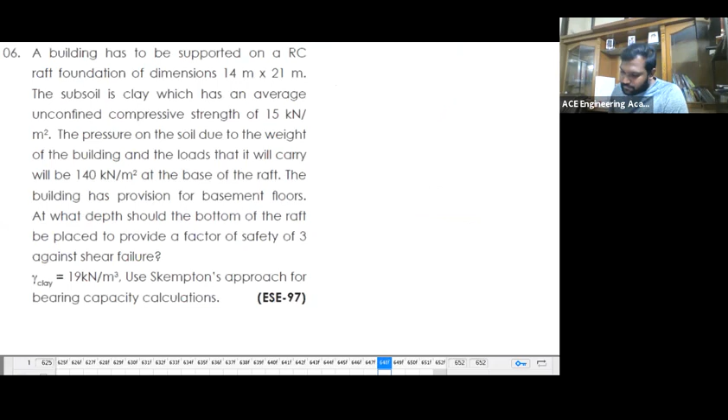Per meter length. Why did I take L is equals to 1? Per meter length, because the load is given as per meter length, right? That's a wall footing, na? You see here, listen to this. This is also one of the beautiful questions. The question is beautiful, if you understand, the answer is very, very simple.

A building has to be supported on an RC raft foundation of dimensions 14 meters by 21 meters. So raft, now you tell me, 14 meters by 21 meters, is it a rectangle or strip? This is a rectangle, okay fine. The subsoil is a clay soil. Very good, so we got to know what type of footing and what type of soil.

Having average unconfined compressive strength, the unconfined compressive strength is nothing but 2 times the undrained shear strength, which is 15 kilonewton per meter square. So what is the CU value? The CU value is 7.5 kilopascals. Okay, now from here, the major thing.

I'm providing a raft foundation, yes. The pressure on the soil due to the weight of the building and the loads that it will carry will be 140 at the base of the raft. And the building has a provision for the basement floor.

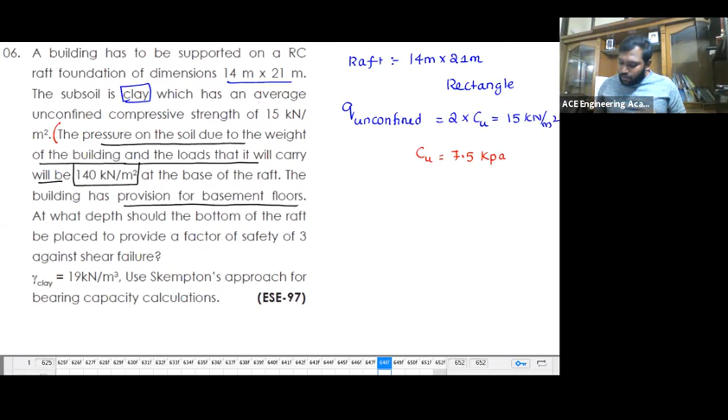Whenever I told you about providing a raft, it means we discussed about compensated raft, right? Let's go back to the compensated raft. Please observe this.

Whenever I provide a raft, see, this is nothing but a raft. But here I am not saying it's compensated. So now can you tell me, the total gross load is nothing but whatever load coming from the structure, that is the gross pressure. Yes or no? Because there is no backfill. When there is no backfill, then what is the Q value? If you have understood this point, then the answer is done.

Hope you got this point, yes or no? So once you got this point, now what I'm asking is, at what depth should the bottom of the raft be placed? I'm asking you, what is the depth? What is the factor of safety I have provided? Factor of safety is 3. Gamma is 19. But this time I am giving you Skempton's approach.

Simply the Skempton's approach is there: depth, width, factor of safety, load, design condition. Now what is the design condition? Q less than or equals to QS. Q is equals to QS. And what is QS? Gross safe bearing capacity, which is net ultimate bearing capacity by factor of safety plus gamma D. And you know that for clay, the net ultimate bearing capacity is CNC. As simple as that, it is CNC by factor of safety plus gamma D. It's all about the NC.

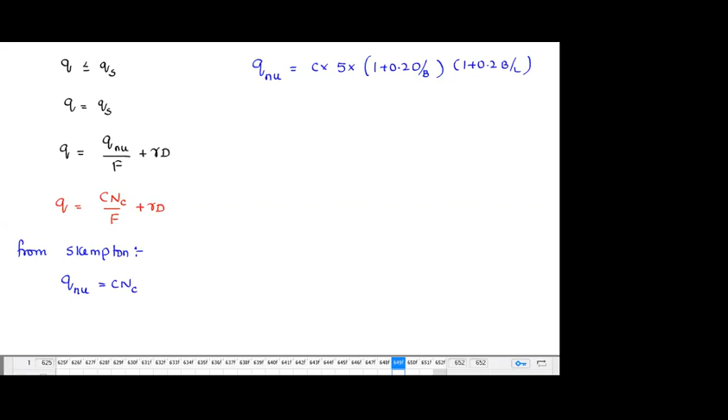So now you see what is the net ultimate bearing capacity here. So what is the C value? The C value is 7.5. Have you understood this logic or not? Here it's all about whatever the given load, is it gross or net? Think. If you get it done, then the answer is done.

Sir, how did you say there is no backfill? That's what, my dear, there is a basement floor. What is the meaning of basement floor? This is the meaning of basement floor. Basement floor is nothing but a cellar. In the cellar, are you going to see any soil mass? No, right? This is nothing but a raft, right? Raft.

So 7.5 into 5 into 1 plus 0.2 into D by, what is B given? 14. Into 1 plus 0.2, 14 by 21. So this 0.2 into 14 by 21, by 21 plus 1 into 7.5 into 5, 42.5 into 1 plus 0.2 by 14, 0.0143 D. So I can write as 42.5 plus 0.607 D. That's it. Now please substitute over here from this equation.

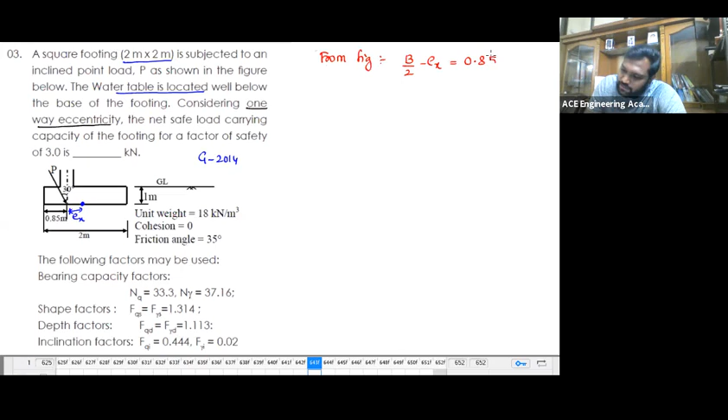Yes, yes, okay. Now, the net safe load carrying capacity of the footing for a factor of safety of 3. I am asking you what is the net load safely that you are going to apply. I'm going to ask you net load.

The net safe load means the net load that you are applying safely. Safely means you are applying factor of safety when condition comes into the condition. So now I am going to find out the net load. What is the factor of safety? The factor of safety is 3. Okay, so I want to find out the net load.

Okay, so forget about the remaining things. First, immediately in my mind: net load, net load, net load. Okay, what is design condition?

What is design condition? I can directly write that: either I can write gross pressure should be less than or equal to safe bearing capacity, or net pressure should be less than or equal to net safe bearing capacity.

Yes or no? What is the net pressure? Net load by area is equals to net ultimate by factor of safety. Oh sorry, no gamma d. Net ultimate by factor of safety, because net safe bearing capacity is nothing but net ultimate by factor of safety.

Everybody understood, right? Up to this point, any doubt? Now let's see.

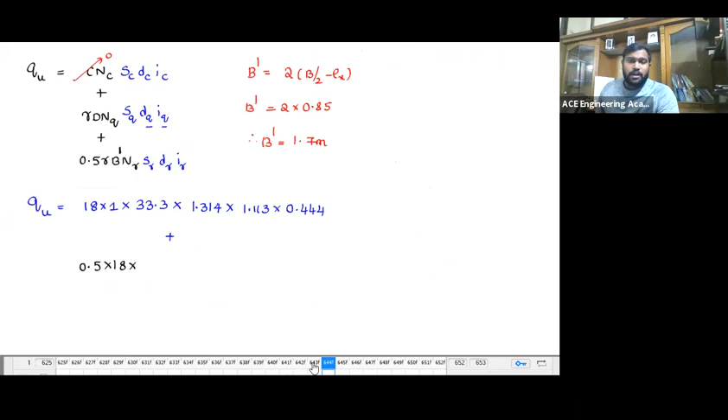Due to the eccentricity, should I have to apply it as B or B dash? B dash. Now what is B dash? B dash is nothing but 2 times of B by 2 minus EX. 2 into 0.85. I can write B dash as 1.7 meters. Yes. Or, B dash is nothing but B minus 2EX, that is, B by 2 minus EX. You can find out EX and you can find out B dash.

So this B by 2 minus EX is nothing but 0.85. From there I can find out B dash directly, as it is one way. Sir, square footing na? Okay my dear, what is Sujana?

I told you when you are providing the shape factor, then why you are going for 0.4? That's what I mentioned, what is meant by that? That is nothing but shape. You don't write that. 0.5 into 18 into 1.7. And what is L dash? One way eccentricity, L dash is nothing but the same because of one way eccentricity.

Okay, so 1.7 into N gamma. Now what is N gamma? 37.16, into S gamma 1.314, D gamma 1.113, into I gamma. What is I gamma? 0.02.

What about the ultimate bearing capacity? 18 into 1 into 33.3 into 1.314 into 1.113 into 0.444, plus 0.5 into 18 into 1.7 into 37.16 into 1.314 into 1.113 into 0.02. So this comes as 405.84 kilopascals, that is QU.

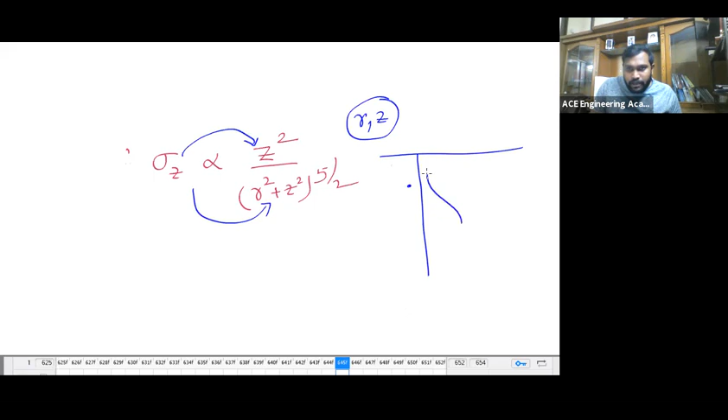But for various values of r comma z, it was observed that if you take any plane, first at lesser depth, the stress is going to increase, reaching maximum. And as the depth value increases, at some point it starts to decrease and decrease, again becomes minimum.

So yes, in this case, there is no peculiar variation. That's the reason why from various values of r comma z, if you substitute r comma z also, we get to know that first it increases, reaching maximum, and then decreases.

And sir, in shear strength chapter, we saw that at some points before the maximum shear stress only soil fails, sir. Yes, it can fail. There is no hard and fast rule like the soil should definitely reach its maximum shear stress. There is some soil, if the soil is weak, if you apply small load, also soil can fail.

Yes. Okay. Thank you. Yes.

Miss Ikra, you can speak out now. Good evening, sir. Sir, I still did not get why are we considering gamma D in raft foundation.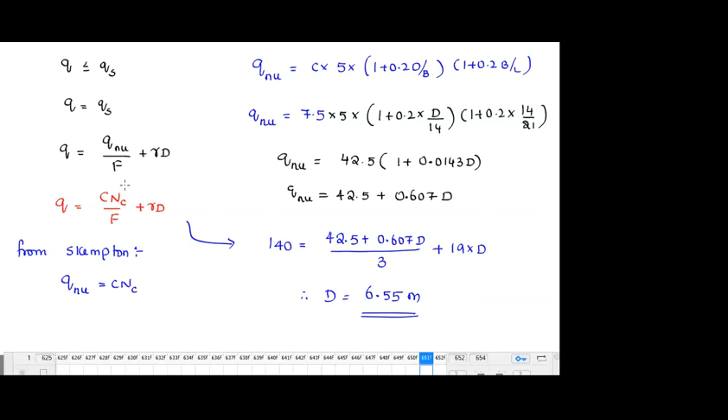Gamma D draft foundation, so the question we did. What is the meaning of safe bearing capacity? The capacity within which the soil will not fail. First of all, what is meant by ultimate bearing capacity? From there you can get to know.

Whatever load that comes, that comes out as Q, yes or no? Yes sir. What is meant by ultimate bearing capacity? The maximum capacity of soil, or the maximum load it can take, from the gross pressure.

Yes sir. But already this soil in the past has experienced gamma D, right? Yes sir. So what I am saying is, present there is no gamma D, now why are you adding? What I am saying is already this soil has experienced gamma D earlier. So let's say gamma D is 50.

Now this Q is 140. I don't care whether the 140 comes only from structure, or whether the 140 is coming from structure plus backfill, I don't care about that. What I do care is, at the end of the structure, what is the total pressure acting on me? 140. Out of that 140, already I felt 50 in the past.

Now you got the point? Yes sir. Now you tell me, what is net ultimate bearing capacity. Now you already are feeling 140, that's ultimate. But already in the past you felt 50, right? Yes sir. So now what is net ultimate?

You can take 140 minus 50, that's 90. Okay sir, this is nothing but gamma D right now. Now you got it? Yes sir. Thank you.

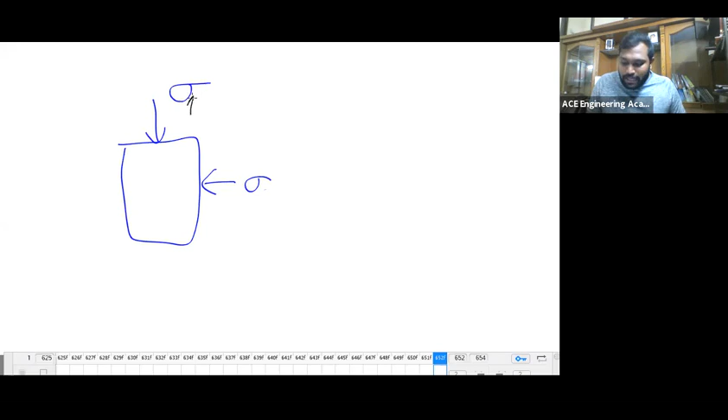See, shear stress is not considered from one side. You are making that earlier both are same, yes or no? Yes sir. Earlier both are same. So now what I am doing is I am not increasing the confining pressure, I am increasing the axial so that I am making this one the major principal stress. This is the minor principal stress.

So when you make the stresses different, then only the shear stress will develop. Now what is the shear stress? Sigma 1 minus sigma 3, by 2, sine 2 alpha.

If you apply both as confining pressure, then where is the shear stress? So if you want to create a shear stress on any plane, you should make sure one is major and other is minor.

So for that, I am applying an additional load in the axial direction. That will increase the major principal stress slowly. Then the shearing will start on any plane. And as you increase this deviatoric stress more and more and more, the shear stress will increase more and more, and finally reaches the failure.

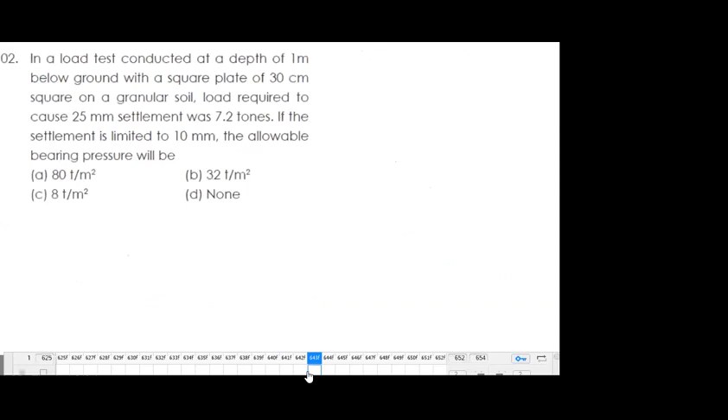Sir, in inclined backfill, Ka formula is given as cos beta into some fraction involving cos beta. For Kp, shouldn't it be 1 by cos beta? Why isn't it just the inverse of the fraction part, and why not cos beta too, sir?

What is cos beta? Beta is the angle. It's not simply like that, you cannot say it directly - that's a derived formula. We derived that and got that result. I am not showing you the derivation because if I show you the derivation, it will confuse your mind, so forget about the derivation.

Sir, one more thing - you said that unsupported depth of excavation is only an active case. Why doesn't it present in the passive state? In the passive state there is no negative pressure, right? In the passive state, from top to bottom, always there is a pressure, no?

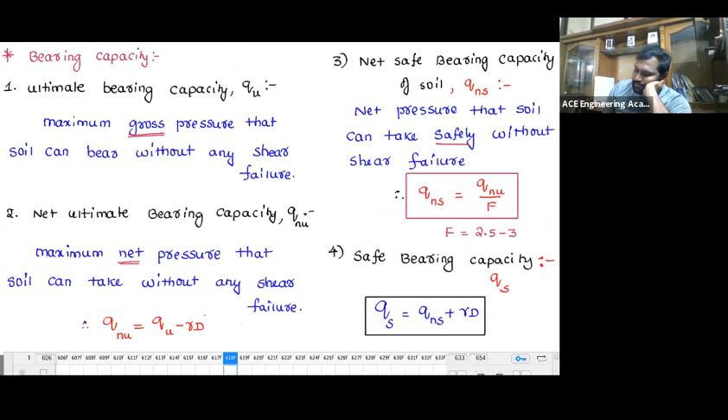Sir, one thing - in passive state, as the load is increasing, vertical load should be maximum, no sir? As the vertical load increases with sigma v, will that be the maximum plane? I did not say vertical load increases - when soil is moving downwards, here soil is moving upward. It's not about vertical load increasing. Soil is moving upward, and that movement is resisted by the resisting force of the soil mass. So where did I say vertical load is increasing, tell me.

You see sir, in foundation topic only, while load is coming onto the soil, it's passive state. In retaining wall it's different, in footing it's different. In wall, the movement is lateral. Yes sir, in footing, the movement is vertical.

Understood? In wall, the movement is lateral - in passive state, lateral force is more. In footing, the movement is vertical, so in passive state, vertical load is more, right? Yes sir, yes sir, I got it.

Sir, one more doubt - in stability of slopes topic, for shear stress calculation, why should we consider only total pressure, sir, why not effective? Actually, in the case of seepage, while seepage is happening, seepage pressure is there, right? Seepage pressure acts into the shear stress only, no?

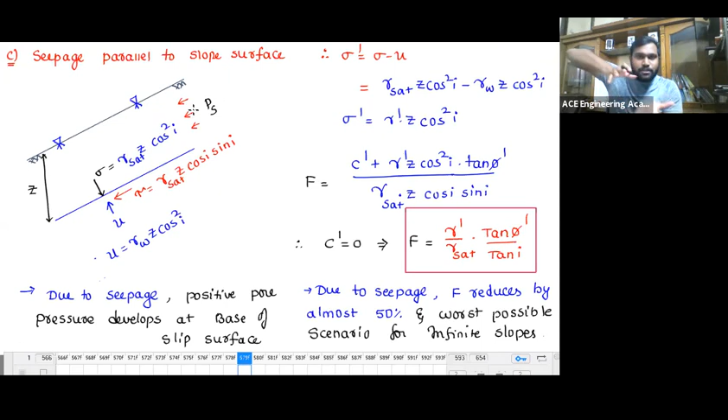So that will increase the pressure - that's the reason why we take gamma sat. In the vertical direction, it is gamma sat minus gamma w, which is submerged. But why pore pressure - let me tell you. Due to this seepage pressure, it creates not only the submerged shear stress but also seepage pressure. Submerged is gamma dash into Z. When seepage is coming, it creates gamma w into Z. Now please add both - what will be there? Understood or not? Yes sir, I got it.

Sir, one last thing - in phi equal to 0 analysis, you have written MD is equal to W into some X, no sir. That X is extended till where? I didn't get that detail. I told you, right - with respect to center. Okay sir, thank you sir.

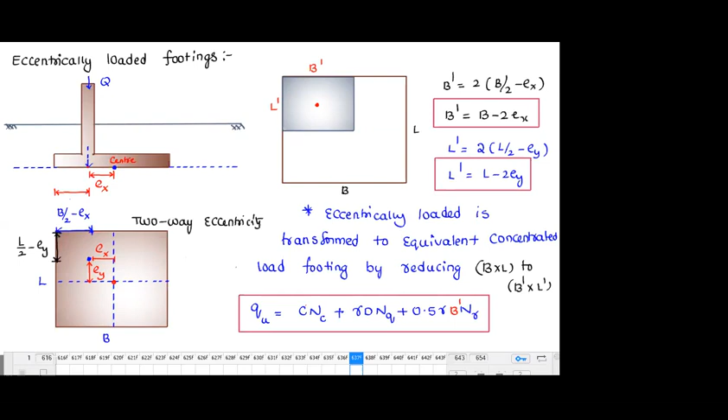Sir, then Q and P, right? Net safe settlement pressure, right? Sir, does that come with factor of safety? Yes, there also comes with the factor of safety, but there is no peculiar calculation for finding the net safe settlement pressure, as most of the soils fail by shear, na? I told you one point that. Yes, you told me.

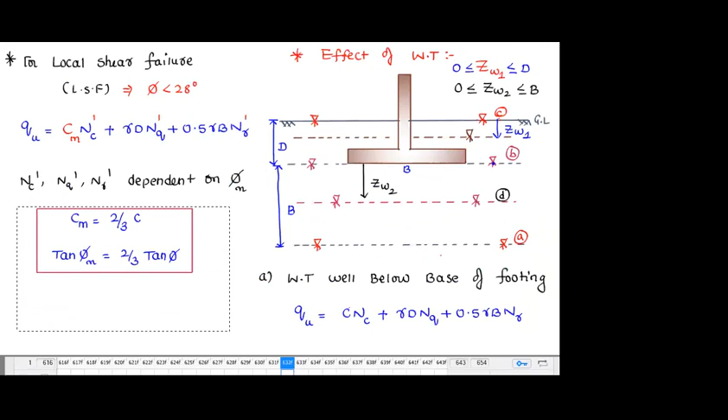Okay fine, so now let me take this one. I can write over here. What is ZW1? ZW1 is nothing but depth of water table between ground level and footing. Okay sir, and what is ZW2? Depth of water table below footing. Okay.

Thank you sir. Sir, like this problem, the RW1, RW2 problems, would they ask one more question, water table correction factor? Especially they will give mention in the question to find out the water table correction factor. Okay sir, the gate problems will you take tomorrow sir? Today I was taking this classroom practice questions only. Tomorrow there is only one topic left over in this chapter, plate load test. So after that topic, some miscellaneous small topics are there, 2, 3. Okay, and tomorrow we'll see the previous gate and PSC questions.

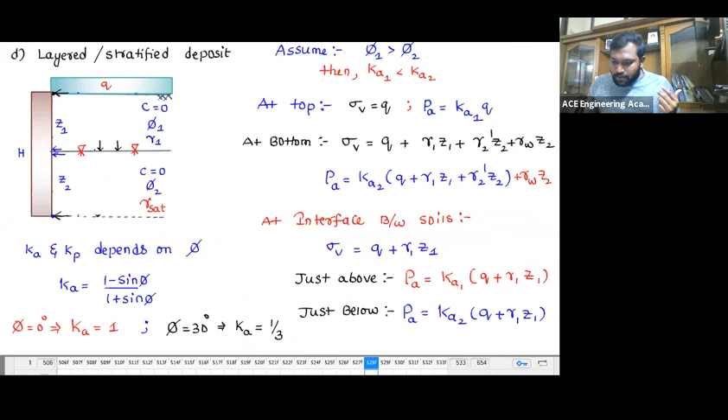Why does the lateral earth pressure increase or decrease? I wrote points clearly about when the wall moves, for active state and passive state. You see here why the pressure increases in passive state: when the wall moves towards the backfill, there is actuating of the soil element. Soil will move upward. If there is no wall, then how come the soil moves laterally?

Understood or not? Yes sir, but here I have one more doubt. Like resisting force develops in the downward direction. How does resisting force influence wall pressure, sir? Obviously, you observe here: when the wall is moving, this wall tries to move the soil mass upward.

Yes sir, but what is the resisting force doing? Resisting force is saying, why are you coming up, you go down, I am going to push you. Yes sir, on one side the wall is pushing the soil, and on the other side soil resistance is also pushing the soil, so that the soil gets confined.

It's just like you are here: from one side one person is pushing you, on the other side another person is pushing you. Now you are under compression or not? Yes sir. When you are under compression, you try to pull out, and you give some resistance. When you give resistance, you are applying more pressure on both people, since both directions are applying the same force.

Sir, one side is wall movement, other side is resisting, both are confining the soil. Then the soil will feel more pressure, and it will exert more pressure on the wall.

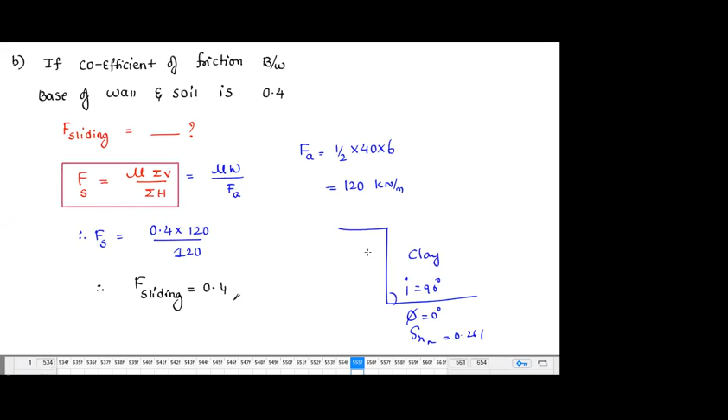Phi is equal to 0, yes sir, that's clay. And if you see, the maximum SN value is 0.261. So it is experimental? Yes, it's experimental. That was given, the i comma phi m value table is there, na? From there you got that.

Okay sir, see this. So you see this one, right? Similarly, when phi is equals to 0 degrees, i is equals to 90 degrees, the SN value is maximum of 0.261. That's it, okay sir. Thank you, sir.

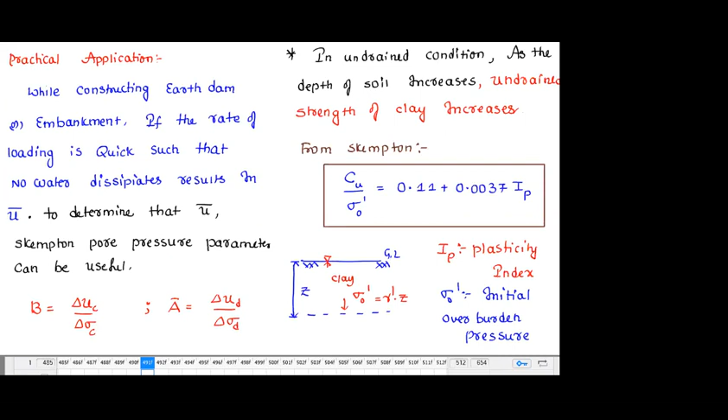No, tell me. Sir, in that problem, shear strength is equal to C dash plus sigma dash tan phi. For finding out normal stress, we need to use the other equation also, that means sigma 1 plus sigma 3 by 2, plus sigma 1 minus sigma 3 by 2, cos 2 alpha. You want me to use that? Sorry sir. You want me to use that? Sir, actually in this problem, we have just done 5 gamma plus 3 gamma.

That means we have just multiplied gamma with height and directly found the normal stress. Rahul, actually, I'm sorry, I'm not able to hear you and not able to follow you. Can you please say it loudly? Sir, can you hear me now? Yeah, I can hear you. So what's your problem here?

Tell me. Sir, we need to find the normal stress now while finding shear strength. Yes, yes, sir. For finding normal stress, we actually use this equation. So you are saying that for finding the normal stress, you are using the major principal stress, minor principal stress concept. If you use that, then where are you going to apply the pore water pressure? You have to apply the pore water pressure, right? Where are you going to apply it? Number one. Number two, they clearly mentioned that dissipation of pore pressure during construction is negligible, which means it's an undrained condition.